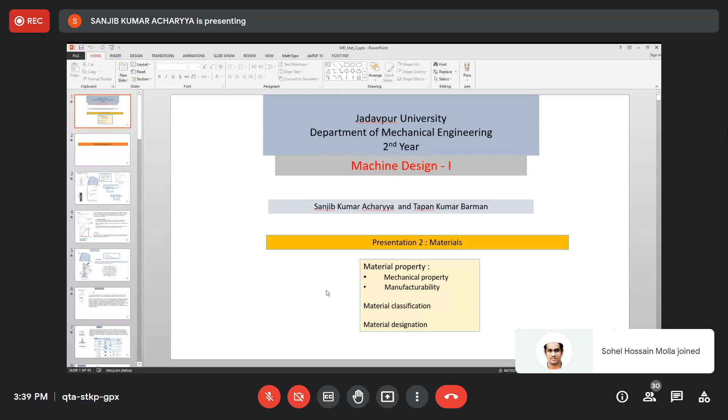So this is the second presentation under machine design 1 or design of machine elements 1. And under the presentation 2, we will try to cover materials, because materials is an aspect in machine design. There are different aspects for material which are related to machine design, like mechanical property.

Selection of a material for a particular component depends on the mechanical property of a particular material. From the design specification, the required material property comes from the nature of load, environment, etc., and which material can satisfy that requirement. So selection of material puts importance on the relevant mechanical property.

Another aspect of the material is manufacturability. Mechanical property required for a particular component can be available within a material, but ultimately the product is to be fabricated by certain manufacturing process. So as well as mechanical property, the manufacturability of that material is also an important concern while

selecting the material. It may happen that the material is to be fabricated by welding procedure, and the required mechanical property is available in a particular group of steel. But if that particular class of steel is not weldable at all, then it will be difficult to select that material. So mechanical property and manufacturability both concern the designer while selecting the material.

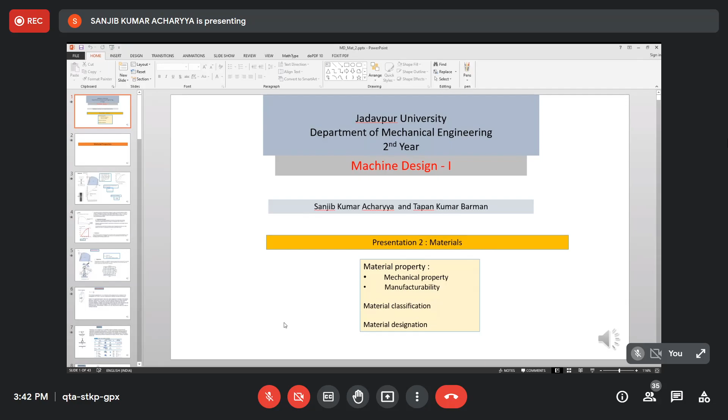We have to know the wide classification of material. And materials are designated by some nomenclature, some standard representation, so that from the material catalog, observing the material designation, the designer can interpret what kind of material it is and the probable mechanical properties before selecting it. So these are the topics to be covered under this presentation.

So first I will try to discuss material property. Most of the things I am going to discuss are probably known to you, if not, only for revision. The first material property that you have already interacted with, I think, is the tensile test. Have you performed the tensile test in your applied mechanics lab? No, sir. Not till now, sir. Stress strain curve you have not developed, no? No, sir. So then I have to discuss it.

First, material behavior when a material is subjected to load. Because of the constraint, strain occurs inside the material. Do you agree? Yes, sir. And what can be the alternative reaction to load? One kind of reaction is that it will be strained, deformation will take place, and another is it can move. If it is free to move, then motion will be the reaction by the component against applied load.

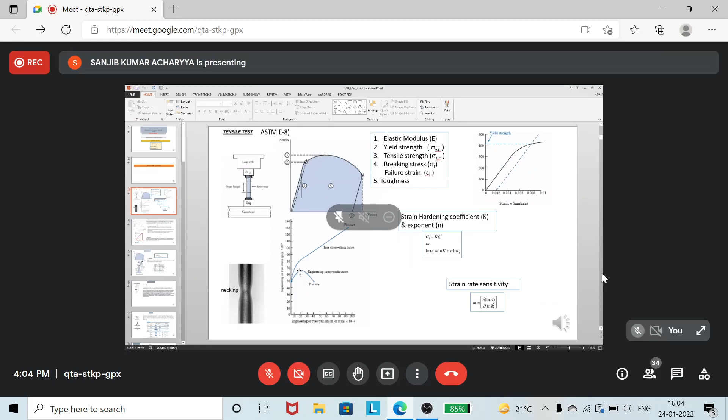Hello? Yes, sir. Hello? Sir, can you hear me?

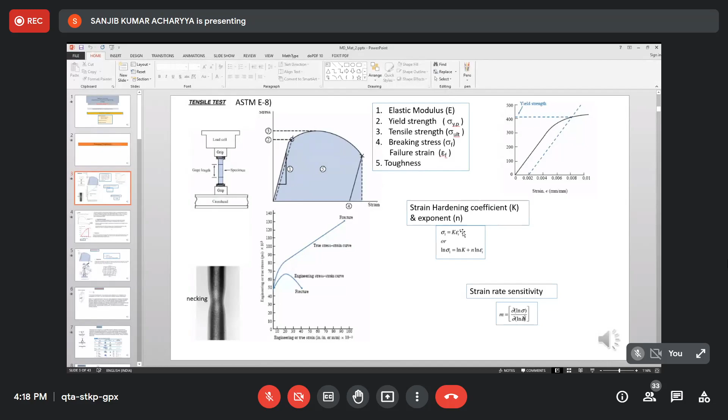Now, from the stress-strain curve, we also can measure the ductility of the material. What is meant by ductility? Some materials allow huge plastic deformation before failure, and some materials will not allow any plastic deformation at all before failure. So the extent of plastic deformation before failure will vary from material to material. And this degree of plastic deformation is generally reflected by a property called ductility.

Higher the plastic deformation before failure, higher the ductility of the material. And the reverse of ductility is called brittleness. If any material doesn't allow sufficient plastic deformation before failure, the material is termed a brittle material. This behavior of material is known as brittleness. Now you can ask, from the stress-strain curve, can we identify which one is brittle, which one is ductile? Yes.

You just look, what is the value of fracture strain before failure? If it is low, the material is brittle. If it is high, the material is ductile. And by measuring the fracture strain, you can represent the ductility of the material. Look here, the strength of this material is high compared to this material, but the ductility of this material is high compared to this material.

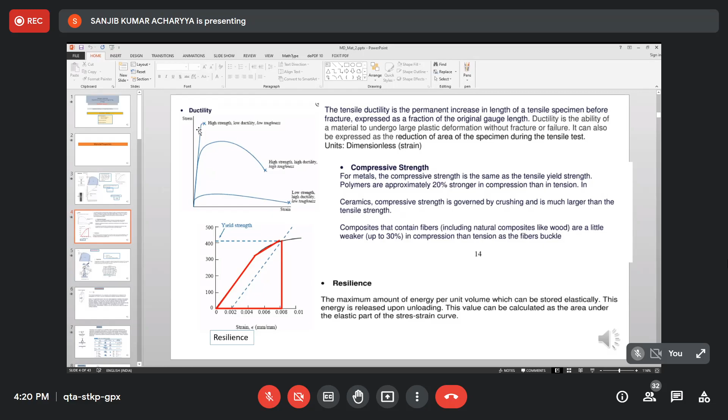But whenever the rate of loading is very high, if the load is applied suddenly as an impact load, then the nature of failure cannot be explained by the stress-strain relationship of the material. It will not happen that the material fails because the developed stress has crossed the permissible stress. It is observed here the material fails because the energy absorbed inside the material exceeds the permissible energy to be absorbed by the material. That means toughness will determine the failure. Toughness is the property which will determine the failure.

And there are mechanical structures where the load may be impact in nature. So those members should be designed on the basis of their strength against impact loading, on the basis of their toughness. So toughness is a material property which is to be measured by some standard procedure. Those standard procedures are Izod testing, Charpy testing, Baker's testing. Different classes of impact testing are there. And what is the standard procedure?

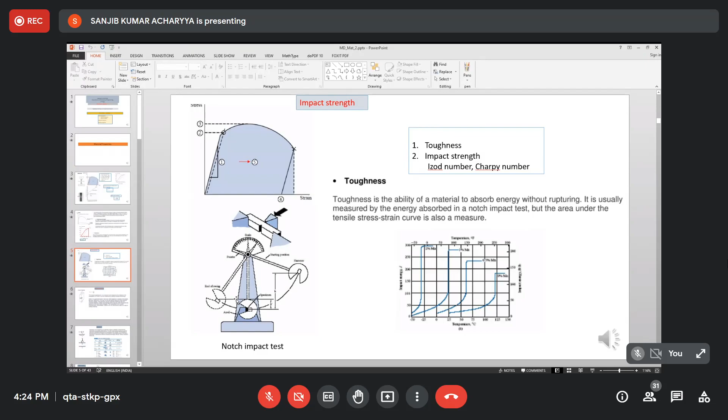Fracture toughness or fracture resistance. So far, in your strength of material, in your undergraduate courses mostly, you will study the material assuming it to be continuum. Means there is no crack, there is no void, there is no discontinuity within the material. Material is a continuum. Still it can fail. Then you try to explain the failure in terms of stress, strain, etc.

But in real life, material always will have discontinuity, small, tiny cracks, voids, etc. And when there are discontinuities in the material, then the stress-strain relationship is not like when material is assumed to be continuous. And as real-life materials contain cracks, sometimes design based on the strength of material will not match with real life. Your prediction may not match with what happens in real life. There, for better matching, for accurate analysis of the material behavior against load, you have to assume a crack inside the material, a defect inside the material.

And the value of stress at which material will fail is not only a material property, but depends also on the size of the crack present. Higher the crack, lower the value of failure stress in the material. That means the strength of the material is not only material dependent, but also has dependence on the size of cracks present inside the material. And whether an existing crack will grow under the given load or not, that is to be measured by some other property.

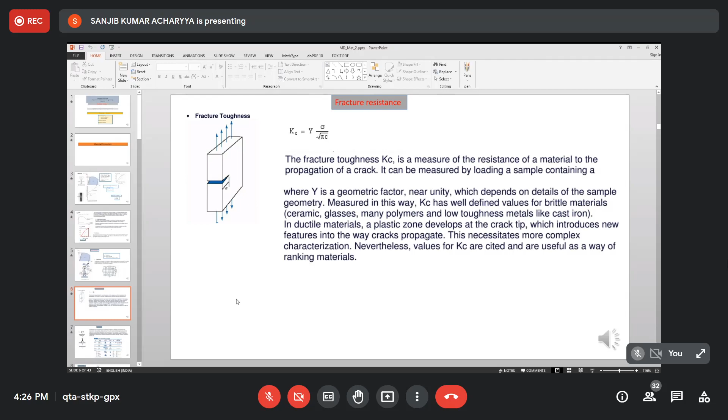Hardness is another kind of material property. It is the resistance of the material against abrasion, scratching, indentation. I think you know the word abrasion. Hello? Loss of material due to rubbing. Scratching is the mark on the surface because of some sharp forces, and indentation is some deepening on the surface, local plastic deformation. So material resists abrasion, resists scratch, resists indentation phenomena on the material.

But this resistance of the material will vary from material to material. You should have a query about which are the basic properties on which this property depends. Yes, material, ultimate stress, yield stress, these have bearing on this resistance. But they are not the sole property. It is an integral property by which you can represent or measure the hardness. And how hardness is measured, it is a very simple experiment.

We apply a load on the surface. We measure the load and we release the load. Then there will be a permanent deformation on the material, a permanent groove. We can measure the diameter of that groove. We can divide the applied load by this diameter. Then that will give you, to create a groove of unit diameter, this amount of load will be required. That will represent the hardness value. That is the Brinell hardness value.